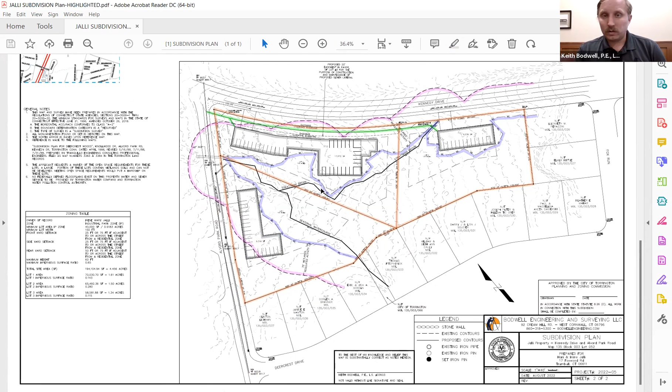I could probably blow this up a little to make it easier to see. The wetland line is that purplish blue line. Can you see my cursor, does it show up? And there's the river running through it - that dark black line. You're saying that's not part of the wetlands? Or is it - yeah, it is part of the wetlands. That is part of the wetlands, yeah, that's in the wetlands area.

It doesn't seem like there's a whole lot of room to put 3 buildings in there. Are those the dark outlines of the buildings? Yes. So where's parking? It's going to be parking underneath the building - underneath each building, yeah, each building will have parking underneath. I mean, you could subdivide it into 3, but it doesn't mean he has to build that much building on it - it's just a concept, right? Correct, we're not okaying that he could build a building that big. He could come back and we could say he could build a single-family house on it.

Correct. As it stands right now, how many stories are these going to be? The parking would kind of slope down towards Alvord Park on Kennedy there, so the entrance would be on the low side, the parking would go underground, and there'd be a single story above that. So on the low side, it would look like a 2-story building because the parking would be at ground level; on the high side, it would be a single story. Is this zoned commercial? It is zoned industrial park zone.

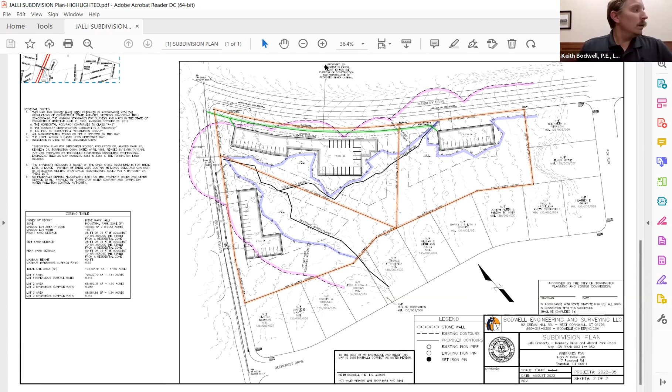Yeah, there's no, I'm not against the building, it's just I don't want issues. Keith, you have the dimensions of those structures on the site plan, right? The square feet of them are on there. But square footage would make them go higher, not be as big.

I totally get that it's concept, I just think it needs to get worded in a manner that forces Keith to come back in front of the board again, with like starting from scratch, basically. We could definitely work on some language for the next meeting.

Okay, so we can basically say, because we're just accepting it, accepting it and say whether it's significant or not, so just for the public hearing. Right, and then when we put the caveats through, we can word it differently so that they would come back, say what we're afraid they might say. Okay, alright, yeah, I'm okay with it.

Okay, good with that, alright, can I have a motion? Okay, so we're approving it, and then... accepting it, right? Accepting, okay, I'm sorry.

So I move we accept the applicant Keith Bodwell for location Alvord Park Road and Kennedy Drive, map block lot 135-352, activity 3 lots subdivision with concept plan and upland review area as an insignificant activity.

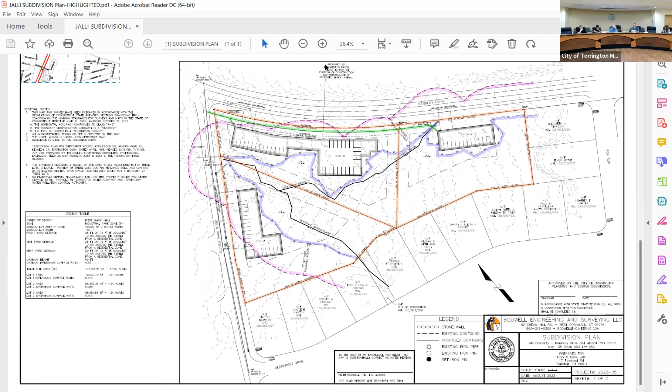Second, all in favor? Aye. Motion carries. Okay, thank you very much.

We'll work on the wording for the next meeting. Because with that lot, whether there was one lot or three lots, it made no difference, because they were so segmented. It's not like you put one big building in the middle, it still wouldn't work.

Next on the agenda, determination of significance, applicant David Alfano, location Eagle Ridge, 244-006-173. Activity: wetland crossing, tree removal, new home construction, and upland review area.

David, is that you as the other guest? He said he was on vacation but would try to attend via Zoom. Probably put to sleep after that.

I just want to pull up that bridge. Actually, something Ken worked on, I believe, but he's not here to talk about that. If need be, I can answer some of the commission's questions.

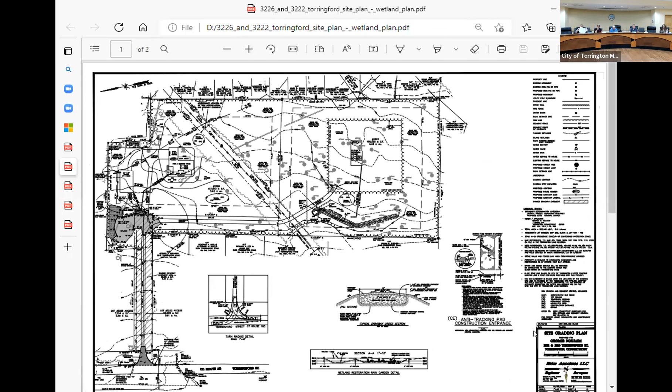Location 3222/3226 on Torringford Street. Activity wetland filling, creation of constructed wetland and improvements within upland review area.

Would you mind if I came closer and just spoke loudly enough to talk about this? It seems to be Rick Associates' old subdivision plan. Again, this is a former subdivision I did, brought it fully through the Wetlands Commission.

I'm gonna go a little bit off script here about slippery slopes and concept plans. Be careful with concept plans because you may get pigeonholed. That's what our concern is, dividing lots and then coming back and saying no, that's not a buildable lot. You get in a lot of trouble.

Anyway, for the record, back in 2008, we proposed a 10-lot subdivision on this 8-acre property, and that subdivision was approved and again fully vetted by the Wetlands Commission. In 2008, this is the plan that was proposed. It was the building of an actual road called Canfield Court with a cul-de-sac and 10 or 9 lots off of that, with an existing house lot not actually served by that roadway.

Back in 2006, the wetlands was flagged by Ed Pollack. Most of you commissioners are probably not familiar with Ed, but I've been working with Ed for 25 years, and he was my go-to guy. He was very conservative, to the point where at some point Ed decided not to work for developers anymore because he didn't like the stress and challenge of potentially being challenged on delineations.

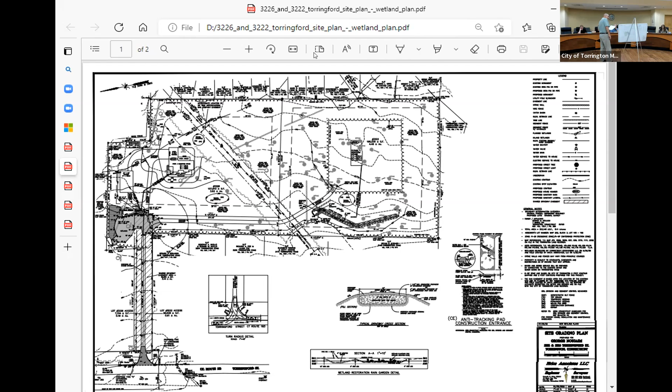In order to access this site, which had very large pine trees covering the entire area, it was pretty open because of the tree canopy. If you walked through, you could see pretty far and quite well. It wasn't a shrub area where you were fighting to see the ground. Ed would have had to walk through this little corridor multiple times to get onto the site, and he defined this wetland very well.

So the owners ran into some financial difficulties, and at that time there was a new regulation put in by the city's engineering department that would require granite curbing on all brand new subdivision roads, which in relative terms per foot is 10 times the cost of an asphalt curb. The curbing on this road would have been $50,000, $60,000, $70,000 all by itself just to do the curbing. It blew the budget out of the water for the developers.

So we came back in 2015 and consolidated the lots, and they sold off the house. We consolidated the lots and only presented a 3-lot subdivision, one fronting right on Torringford Street and 2 lots coming up a shared driveway to the back. Wetlands were still the same at that point. What we proposed was a couple of very shallow drainage areas on the site, planted as a rain garden to handle roof and footing drain runoff, highlighted in green.

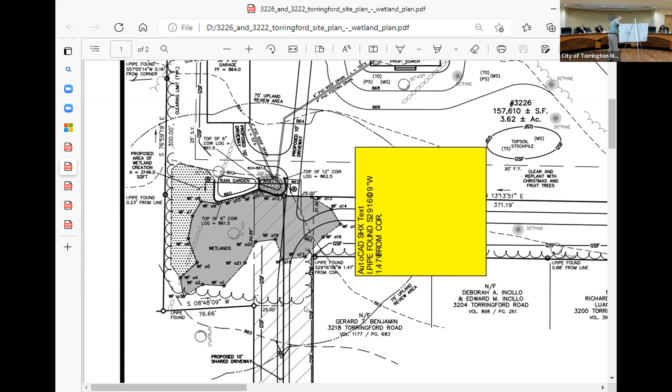There's no other access to these 2 lots besides the corridor that is here. The driveway actually splits and goes in. There's an existing access way here to the most rear lot, and then the other lot opens up behind. There's a gas pipeline, and this lower wetland that's offsite was due probably to the creation of the gas pipeline—they regraded over, created a low spot, and created a pocket here.

But this wetland now is fairly viable. And just looking at how the plan goes, there's somewhat of a connection between these two, but not quite. We've had George Logan, professional wetland scientist, come out and flag these wetlands, and it doesn't go any further than here, so they actually don't connect, but they're fairly close. This one falls within the 75-foot radius of that one, or the radius is now overlapped, but the wetland's there.

So we took a look at it, and the outlet to this particular rain garden was smack in the middle of the wetland. We decided that's probably not a great idea, that the wetland shouldn't have piped water going directly into it like that. In order to get the pipes out of the wetlands, we had to change the site plan that was originally prepared for this lot and raise the house up.

In doing so, what it afforded us to do was create a sort of plunge pool forebay for piping from the garage and proposed house into a forebay area that's going to be riprap. Some vegetation will take if there's enough silt in there, but since it's riprap, it can be cleaned and then put back in. That will overflow into a rain garden adjacent to the existing wetlands. We calculated the amount of disturbance because of the driveway, and we're creating an expansion, a proposed wetland to the north of this wetland, to add on to it.

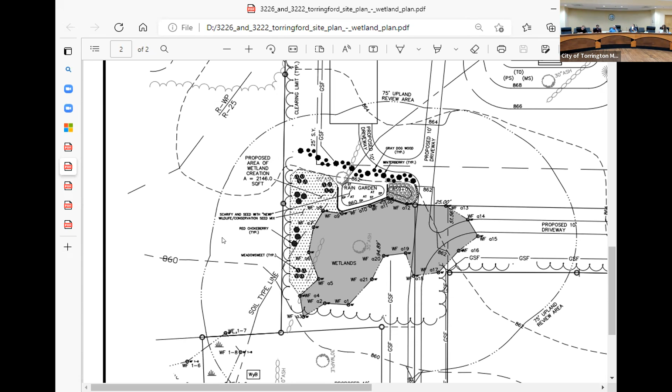Okay, next is staff report, enforcement report update. So the two things I had to report out on were, one from our last meeting, Mr. Slowa, who came in for a show of cause hearing. Yeah, it was quite a show.

And so he was appealing his cease and desist order that had been put on the property because he was not operating in compliance with his existing wetland permits. So the commission left it in place. Since that time, he was given 30 days to get everything off the site and cease activity there. I visited yesterday and he removed everything except for the bulldozer, which is up by the road, nowhere near the wetlands.

He informed me today that the bulldozer has been taken off the property as well. So I have to go and confirm that's the case, but the property is completely clean, and the back by the wetland looks phenomenal. I was actually surprised at how devoid of anything was there back there, so. Yeah, so that was a positive outcome there. He has plans for the future, but we'll see. This is right to go develop a single family home there. So we'll await that application when it comes.

The other update I wanted to give was on Felicity Lane. And you all remember this was an enforcement incident Jeremy had been following up on. I just wanted to check in with him, and he said that basically a cease and desist is still on the record, but nothing has changed. There's been no attempt to clean it up. So Jeremy is pursuing it through legal, and he's doing it both for zoning and wetlands, because there are zoning violations as well. So that's officially moving to legal, and I'll keep you updated on the status of that after that happens.